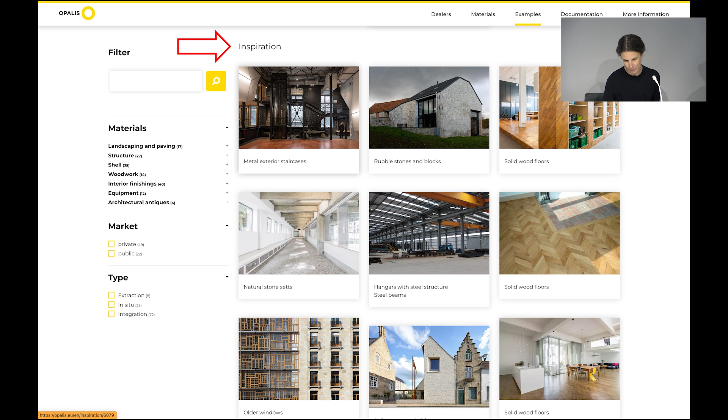It deploys detailed information on the project and the different phases that led to salvage. Then there's the inspiration part, which features more separate moments of design with components that are being reused, something more of an Instagram, Pinterest-friendly approach. It goes from very prosaic reuse of tile, for example, to salvaged contemporary windows or interventions that require a bit more design thinking.

This year, part of our focus is going to be gathering this type of project with a special focus on the UK. So this is a bit of an open call. If you know of any such projects, or would like to contribute further, please contact us at this address. There's also a form next to the door to add more details and contact information. You'll understand where this leads us.

All the projects featured today, we really hope to invest editorial work into including them on the Opalis page of exemplary projects, because they are pushing the limits of what reuse can do today. We're really happy to discuss them with you together. I want to say this effort is really just an initiative - it's only the beginning. The only resource we have is a lot of generosity and goodwill from you. We hope that in the future we can benefit from structural funding to support all the current stakeholders working on this type of project.

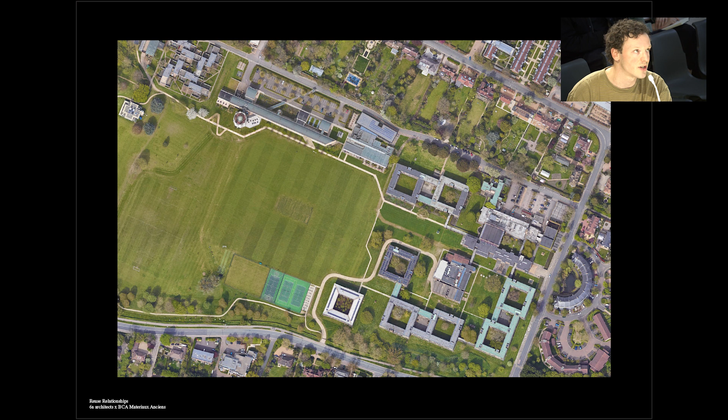So in a way, maybe counterintuitively, I've selected to talk about a new build project, partly because I understand everyone else is going to be talking about reuse projects, and partly because the relationship set up in this project is really key to our entry from heritage into working with reused

and reclaimed materials. So it's the project for Cowan Court, Churchill College in Cambridge, completed in 2016. The project uses different approaches to reclamation and applies the word reuse in a broader, architectural way, not only literally with the cladding.

So it's a 68 resident building, courtyard, which you can see there - this one next to the existing 1960s brutalist project on the right. 68 bedrooms, student residence, effectively.

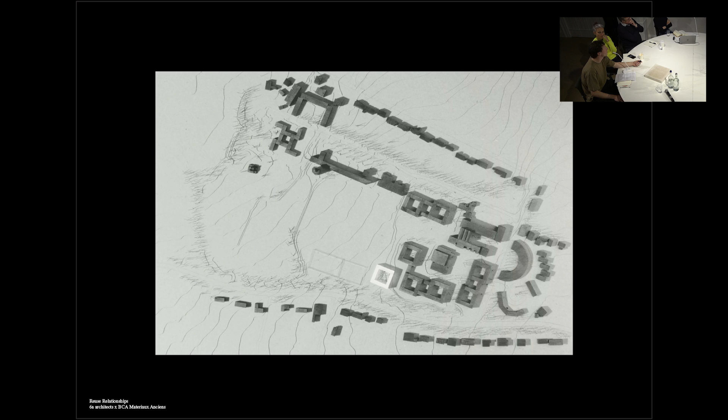Starting in 2008, when we won the project, it went on pause and then came back in 2012. Many of you might know the famous competition for this project, which garnered submissions from various different famous architects of the time. Sheppard Robson won the project, and the result is this series of interlocking courtyards.

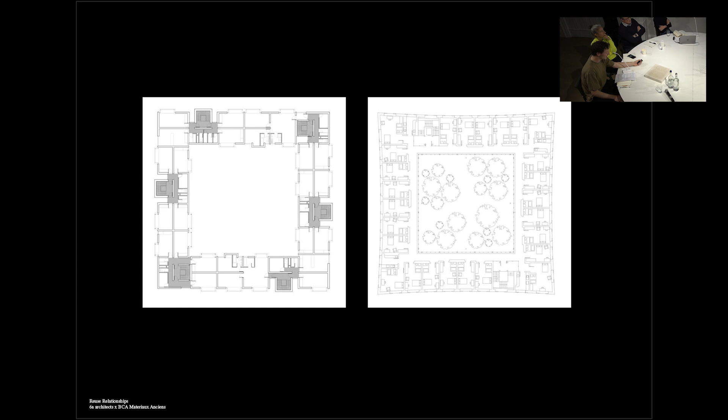It's famous for its English brutalism, exemplary of the time, and the innovation of this white heat of technology 1960s project is part of the reason the clients were so interested in a new layer of innovation with this project, where we introduced ours - you can see down on the white of the model.

Formally, Cowan Court reflects its typology, reflecting the same square court of the exact footprint of the existing buildings, but where the original staircases produce a kind of vertical accessibility, you can see on the new, right-hand side, an internal cloister facing in towards the courtyard with a densely planted garden, making all of the rooms fully accessible and facing out towards the great views beside.

The project combines glulam, CLT, softwood traditional framing, as well as reclaimed timber on the facade, playing into the reuse of the concrete tectonics found in the original Sheppard Robson building.

The facade itself echoes the existing buildings in three layers, with clear horizontal banding, where this classical column entasis curves at a different level at each floor, and the windows are spread around playfully on the facade. The reuse of timber - the original buildings appear to be largely of brick and concrete, but actually there's quite a lot of timber detailing in the hardwood doors and the fine rooms of the central college.

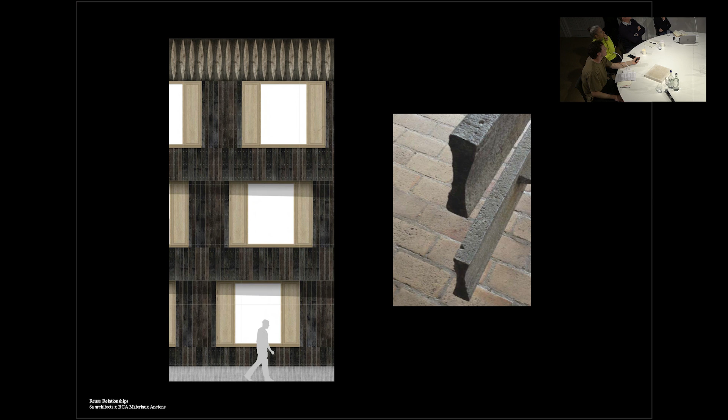So the reuse of timber and the total application of timber on this project really feels like a continuation of the materiality of the project, especially in the reflection of the cast texture you can see on the formwork. Then running into the details of the frieze up at the top, it again plays on a kind of mimicry—this is, for any of you who know the college, the entrance gate.

So all of these elements of reuse reflect, in a broader sense, a kind of working with the existing.

In terms of the procurement of the timber, we entered this through our kind of heritage experience. We had worked with both Declan Malloy in London, in Essex, for the reclaimed floors in Raven Row, and with Ashwells on the treehouse and the extension of a listed building.

But for the procurement of this project, we began by looking around the UK at various suppliers, where we quite quickly found that the timber available in the most reliable quantity and most reliable sizes was something called French wagon timber, effectively reclaimed from carriages that had driven around Europe for decades. Typically these are about 30 years old and a fairly consistent size.

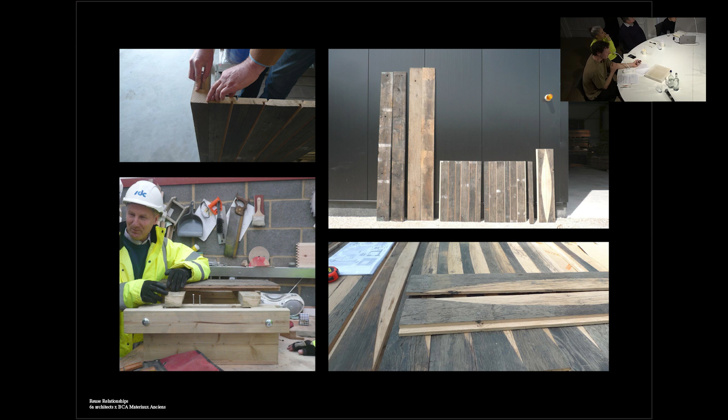In 2014, we got quotes where they were all roughly the same, around 150 per square meter. Now, the QS had costed for this at 210 per square meter, which in hindsight you kind of understand. Hopefully that was something we had discussed with the QS early on, to make sure we understood that reclaimed material does come with additional costs, so the eventual cost of this material would have been higher in terms of the activities that followed.

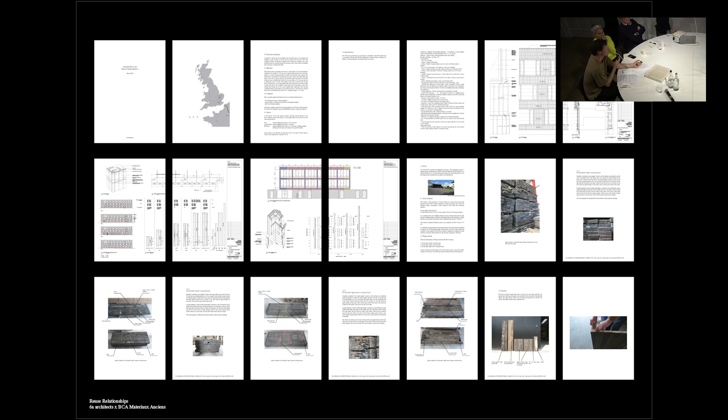Initially that seems like you've got loads, but in conversation with BCA we understood that the expected wastage was about 50%, so that was the perfect amount of material. In hindsight, maybe they inflated the numbers just so we'd buy all of it—no, I think it's a pretty typical thing for a timber joiner to say they need twice as much material to make whatever it is. So this was the oversupply of material we ended up getting.

They also produced various samples when we arrived. You can see on the corner we added a solid piece in order to not reveal the depth of the cladding, so it became much more about texture, surface, and colour.

You can also see the lapping of the joints—we elected for a lap joint, partly because when you cut the timber it's likely to cup and react once all the stresses are released. The lap joint is the most effective way to reduce that potential cupping, but the widened, large lap also gives a pinstripe effect as light brings out the dark, adding to the texture of the reclaimed material, and also serves as an aspect of tolerance.

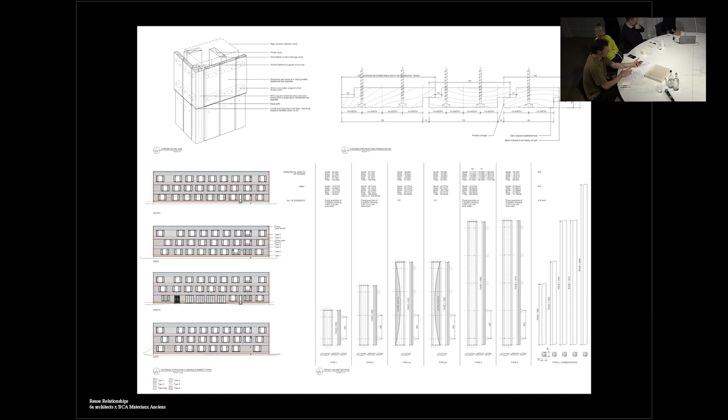But eventually it came down to a meeting with the Churchill College Committee, made up of almost entirely academics, maybe 40 odd people. In the meeting, Tom was asked: has this facade ever been done before? That's the kind of question you would typically answer with maybe five references, saying yes, it's been done before, don't worry.

But in this situation, because of the procurement style—this was design and build in the end—because of the scale of the project and because of the client, we just didn't have those references. So Tom said no, and luckily the response from this academic was, 'so you mean we were the first?' Whether that's due to Churchill College's ambition to be innovative with architecture, or simply an academic research interest in trying something new, that was a key success and a key win for the project.

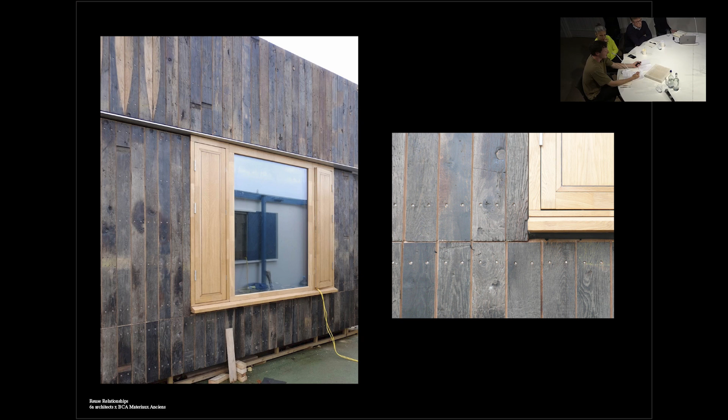This really speaks to circular procurement today—the fact that Churchill was able to buy the timber ahead of procurement was a real risk of theirs. Today we look for procurement facilities and marketplaces which can reconcile these differences in timescales between projects which are about to finish or about to reach a certain critical stage.

Another approval we needed was from TRADA on the cladding quality. We approached TRADA not only on the detailing and specification, but to try to get a certificate for this cladding. They tested it and produced a report, not a certificate, and where another client—a typical developer—might feel that was not enough, Cambridge, as a university college, never sells their buildings.

They have a 300-year lifespan and development plan, so they recognise they don't necessarily need a warranty to say, okay, if we sell this we need a certificate for it. That was another way we were able to pass a hurdle you'd typically get in a reuse project.

TRADA produced a specification which was quite long, but I'll read one example: face finished dimension varies from 150 overall—this is meant to minimize wastage, but a max of 150 is to avoid pulling fixings during shrinkage and expansion. So the way you deal with a reused or reclaimed material has to flow through all of the production an architect is involved in, down to the specification.

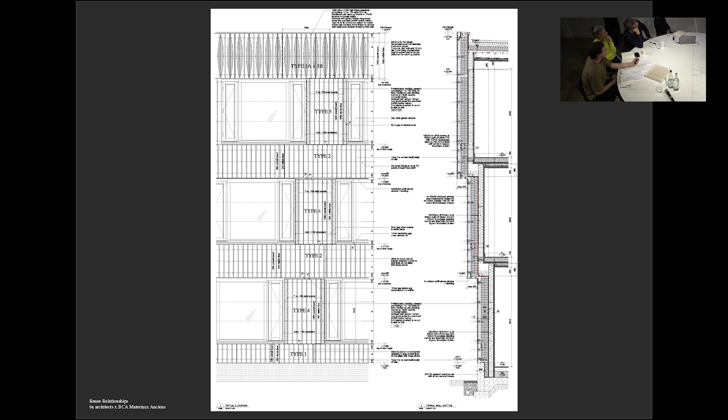Another bit of detailing developed alongside the contractor was to avoid these dark patches beside the windows. The contractor said it's much easier for them to prefabricate these timber boards in panels and fix them on. So what we ended up doing was leaving off one board on the side, so that on site the exact board width could be laid in.

So yeah, I think you can even see it, maybe not at this scale. You can't really see it from this scale.

The contractor also produced a rig on site that helped them take these prefabricated panels and lift them directly on. I think another key element in working on reuse projects is engaging with the contractor in the same way you would on a film set, building jigs—like in a workshop you'd build a jig to make something bespoke for that exact purpose, but you're going to use many times to deal with something quite specific. The jig they produced to lift these onto the facade was a key suggestion by the contractor that was really helpful for us.

A DEFRA report recently released indicates that between 1998 and 2011, the reuse of reclaimed timber fell by 90 to 98%. When you compare that to total consumption, which has increased, that's an equivalent reduction in reuse—9% of timber in 1998, so 1 in 10 pieces of timber was reused, has now dropped to 0.43% in 2011. So the reuse of timber has dropped hugely dramatically, and that's consistent across the majority of materials. We have to drastically increase the reuse of timber.

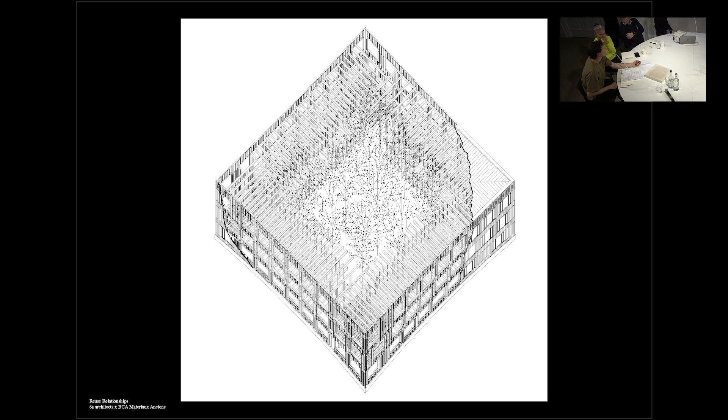Looking at the project again, you saw the photos of the structure exposed. A lot of it was new timber, and I think potentially we would look at opportunities to swap out the timber doors or any of the softwood framing with other reclaimed products.

This project came, I think, before circularity became a big topic, and so it progressed in a pretty improvisational manner, one that came from our understanding of the nuances of working with heritage and having to engage with quite particular circular collaborations with different people. Obviously BCA participated and contributed a huge amount, but another key relationship that was necessary there was Trada, acting almost as a kind of material authenticator, taking a material and allowing it to be used in a UK context. So that was another key relationship for us.

I think that's it. Sorry if I went over.

Oh sure, God, you've put me on the spot there. Do I know exactly what Trada is? The Timber Research and Development Association—there you go. Thank you, Robert. They are the association that has the kind of timber expertise across the UK, and they produce a number of reports and guidance.

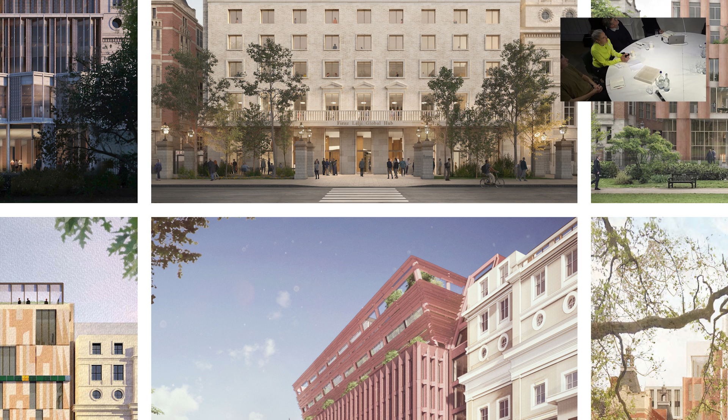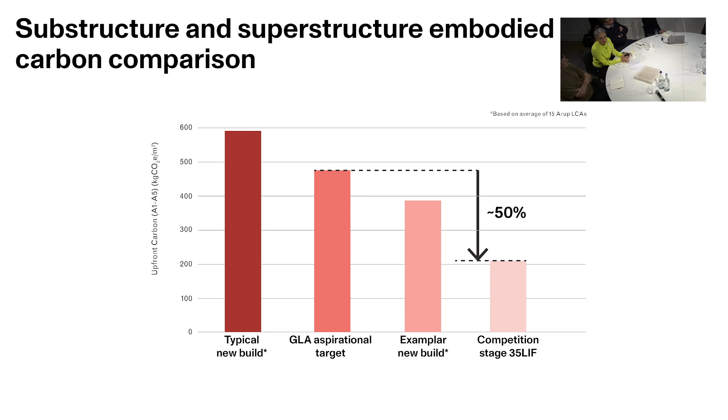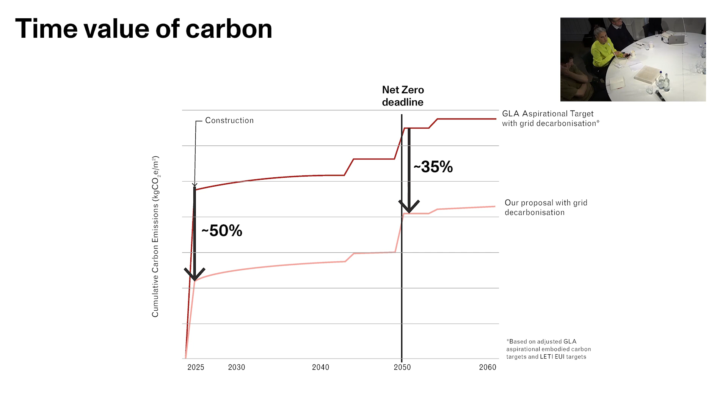The competition was solely, I would say, about telling the story of the value of the material of this building—not the value of the building itself, because it's not a listed building. As you saw, many of the other competitors decided to disregard the facade completely, but our key slide was how we were able to lower the impact of our proposal by 50% compared to all the others. We really wanted to demonstrate how important it is to save carbon not so much in the future, because hopefully the whole grid will be decarbonized, but how massive a change it would be to actually retain the building and reuse the material now. It was a big shift to not just saving carbon, but saving it now and not in 50 or 60 years' time.

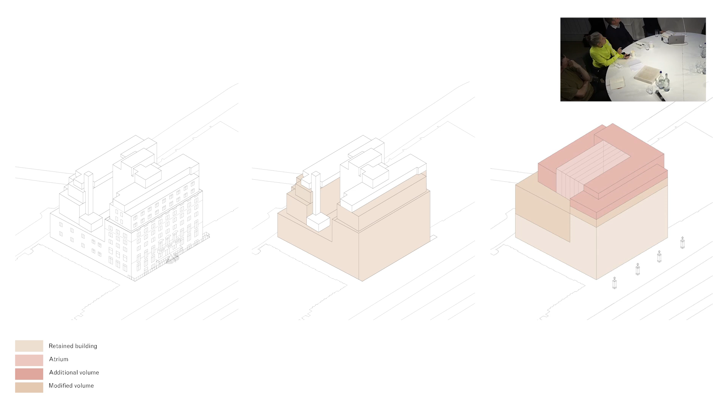So this is, in a nutshell, what the building is. You see the existing building there—we retain the majority of it and extend at the top. That's the condition of the building we found: actually a collection of buildings built in different phases. You can see the floor-to-ceiling heights are very different north to south, and it's very difficult to move inside the building. There are floors that don't communicate with one another—you actually need to go down to the ground floor to reach the same level from the south entrance, for example. Here you can see how we worked with the existing building, opening up the center and connecting the ground floor to street level.

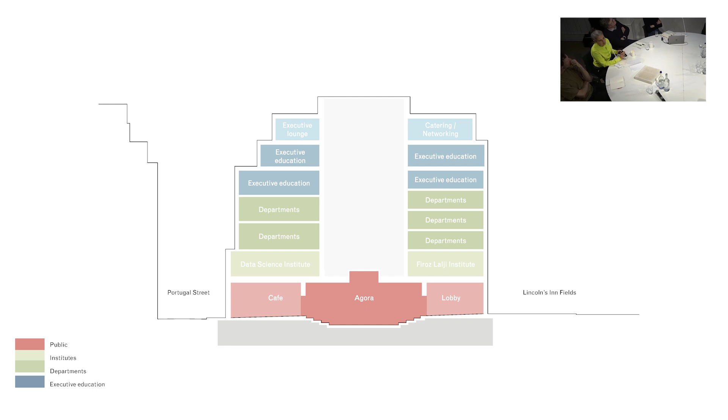Really diverse program inside that we were able to fit within the existing building, kind of public ground floor and first floor departmental areas. At the very top is an education facility with classrooms and services for the executive education.

I'm glad that you presented an educational building. So somehow we see the university pushing this agenda very much at the forefront.

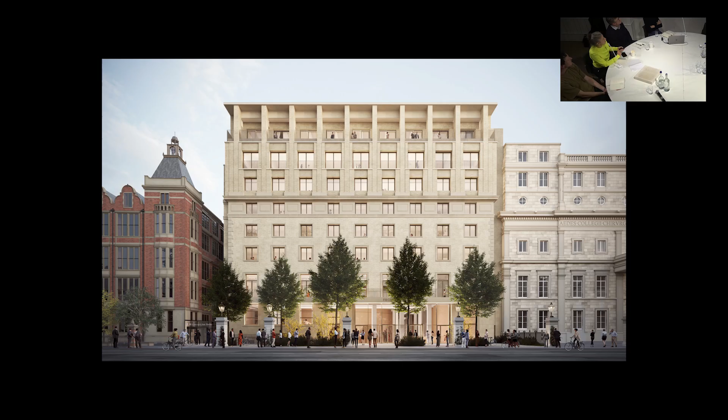So that existing building, this is the project. And just an image on the outside - you can see how the existing facade is growing into the new building, and the entire facade becomes a contemporary design. So the project represents a new approach to reuse that moves beyond pure heritage and conservation concern, and recognizes the building should be protected for its material quality and physical capital.

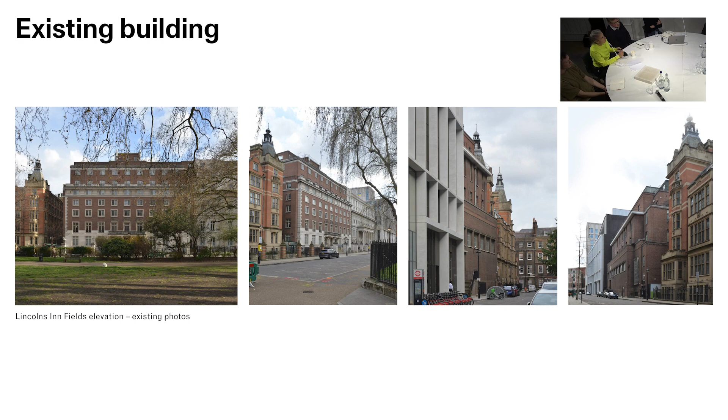As an important part of the fight against climate change. So what does it mean? It's really looking at your building as your material quarry. You take the building you're working on in its entirety, you don't waste what you already have, but you're able to work with it, and the new architecture always grows from what you can find there.

So as I was saying, big study on the existing building, actually also with the students of the Department last year. There was great collaboration. It was really nice to share the knowledge of the building and think about how to incorporate circular economy in every aspect of the design, even starting from a very research approach, like as you're doing.

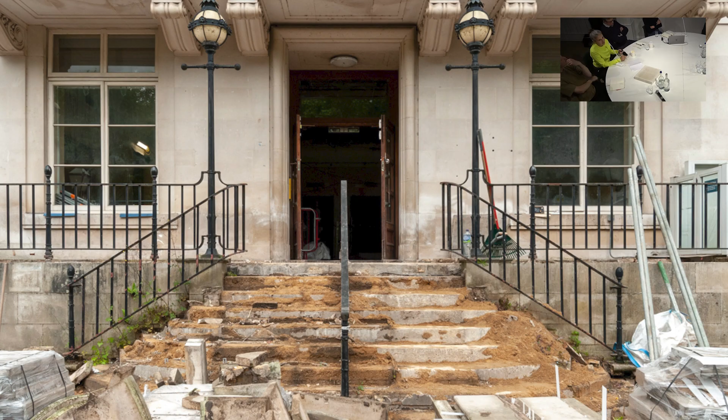So how can we use sustainability targets to drive new design ideas? We wanted to shift the thinking a bit from a box ticking exercise - yes, we do this - but how actually the sustainability targets are driving the way that we design, and how we use them to actually inspire new design ideas.

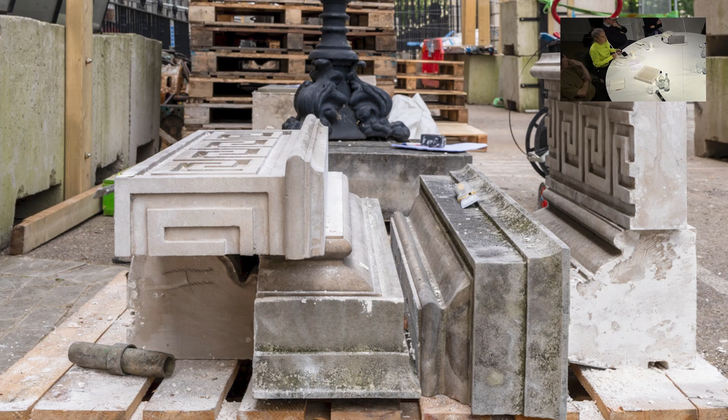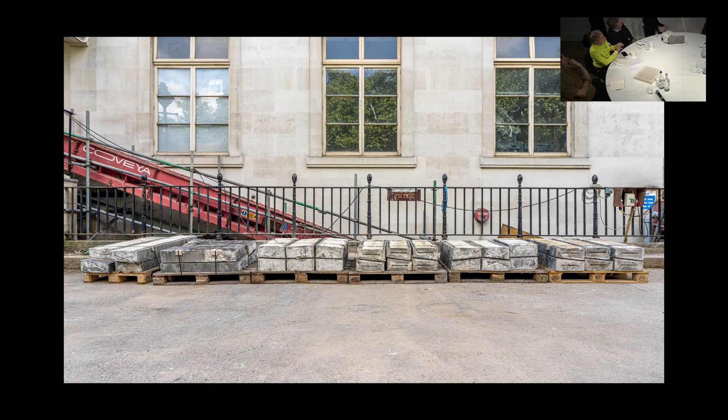And that's the building as it is now. We start working at the very top, and inside there is no hoarding on the facade because we are keeping it at the moment. We are just deconstructing, so the pure construction didn't start yet.

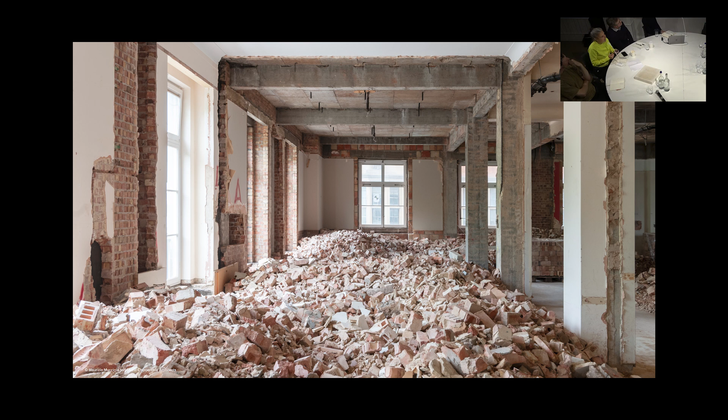As Robert will tell you in a second, we started saving stone by stone. We took all the opportunities to actually save as much material as possible. Procurement is definitely a key part of the process, especially in our case where we had two contractors - one is the enabling work contractor deconstructing the building, and the main work contractor is not appointed yet, but we know we are working with them already to make sure that the materials we are saving will find a proper place within the new building.

So, for example, PAYE is a really key link in between the two. We need to learn how to work beyond just the relationship between the architect and the main contractor - you really need to know the whole team and work closely with everyone. This is exactly the work that PAYE is doing, collecting the stones. We went on site several times, did a survey, and learned about the existing building and the opportunities that we had there.

And finally, those are the coping elements that were at the very top of the building - the stones that were at the edges of all the steps of the existing building, which were collected and stored at PAYE.

We are doing a very similar approach also to the inside. This is just a peek of what is going on inside the building. We are taking the opportunities to save as much as possible of the bricks that were part of the build-up of the internal walls. So we are cleaning them, palletizing them, and they are now ready and waiting for the next contractor to come on board and reuse them in the project.

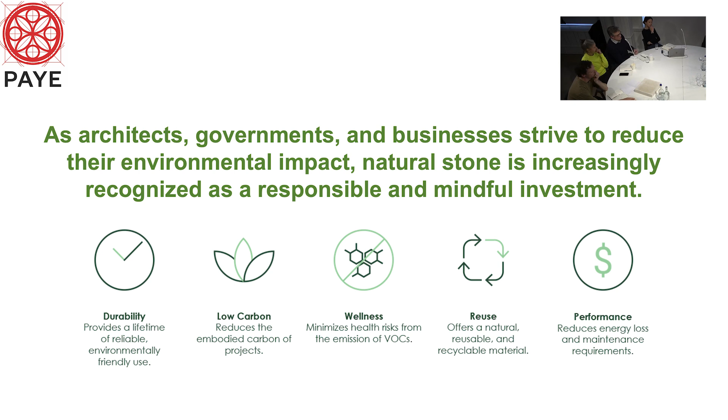We're stonemasons, and stone is such a fantastic material, and it's really suited to the ability to be dismantled and repurposed and reused. There are so many good benefits to its use.

I think part of that is down to the London planning policies. We see the difference between London and the South East, predominantly London really, and the rest of the UK. There's a real focus on material circularity and repurposing in London, and I'd say the rest of the country is about 5 or 10 years behind in that development of ideas.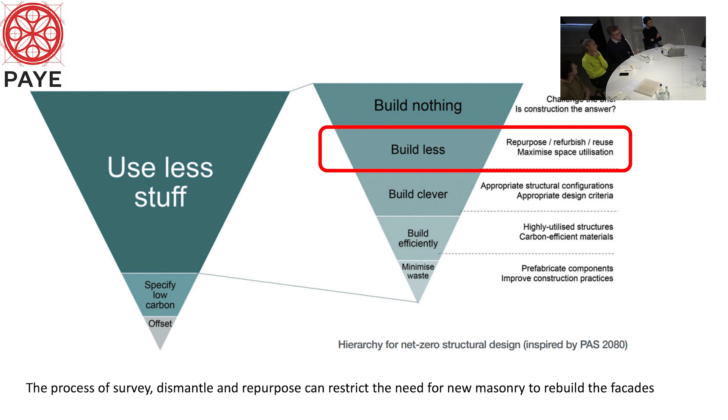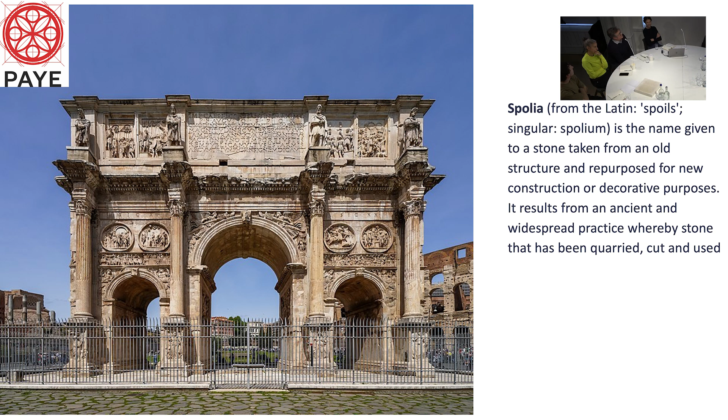There's some great work that's been done by the likes of the Institution of Structural Engineers that really does look at the idea of how you repurpose and reuse materials, with the main premise being trying to use less stuff. It's not always possible to do nothing, and we sit in the second box down, which is build less. So we try and take the materials, store them, and then reuse them in the most beneficial form.

It's not a new thing. There's a great word called spolia, the Roman or Latin word for the dismantling, repurposing and reuse of stone on the next project. And they were very good at it.

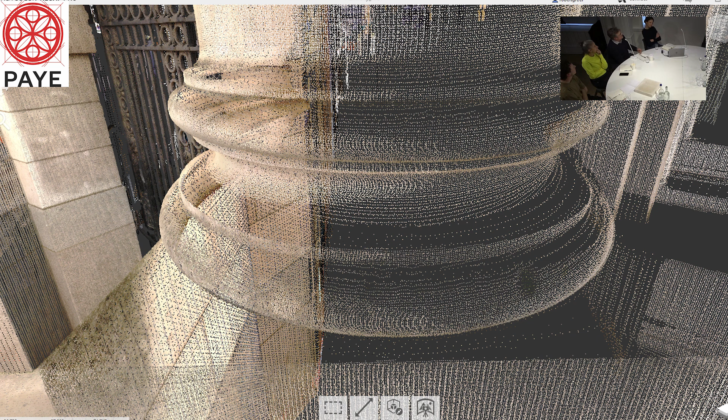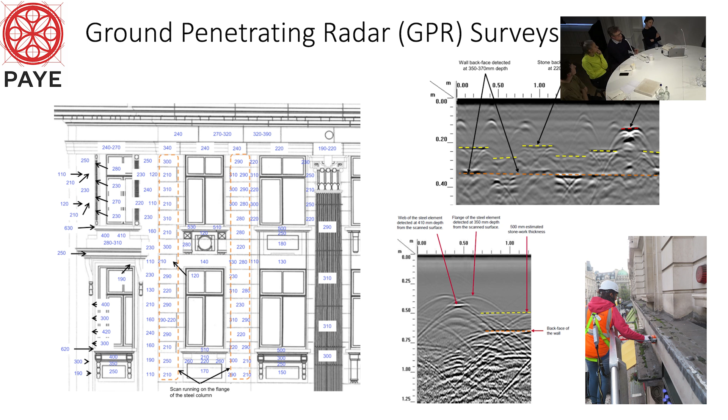We can then do GPR surveys, which allow us to understand what the depth of each stone is. And from there, we can create a 3D model.

So this 2,500 tons of stone that we've dismantled, we're going to put back about maybe 1,500 to 1,800 tons. So we're going to have 700 tons of spare stone that we're then going to start to repurpose and reuse. It's classed as carbon free because it's second hand, it's come off a building already.

So we look at the circularity of stone, and it's very high value. When we dismantle a building, we normally achieve about a 90 to 93% material recovery rate. We may sacrifice some stones, or some may be fractured and damaged that we can't reuse, but typically we're getting a high number. And when you start to look at its repurposing and reuse, looking at the LCA assessment of materials, it's a very high circularity percentage.

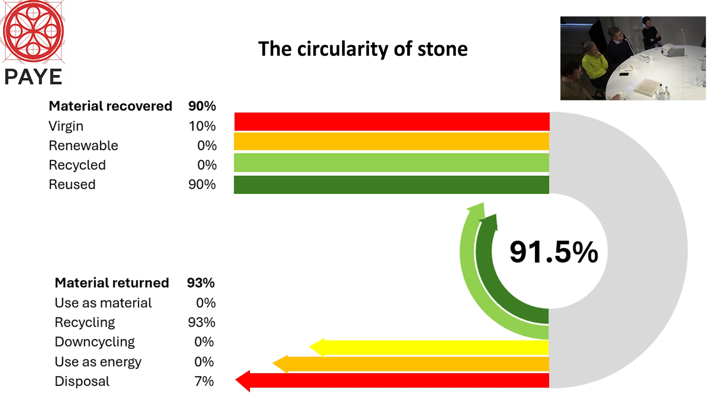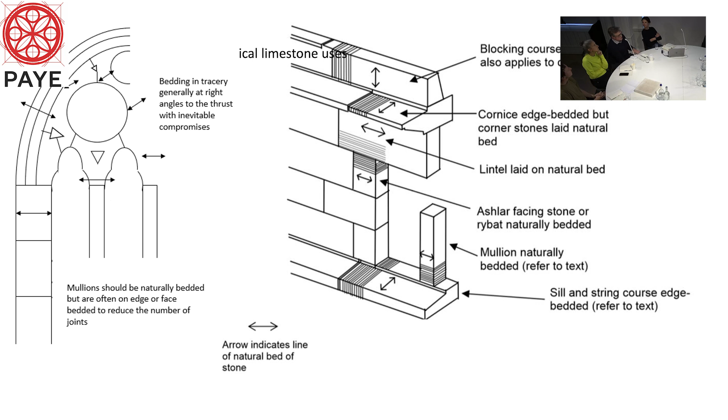Like all butchers, we try and use as much of the original stone as possible. But it's something we've got to be mindful of with stones, particularly limestones and sandstones. They are sedimentary, so we have to be respectful of the bed of the stone. So ashlars, vertical face stones, the sedimentary beds are horizontal. Copings work in a slightly different way. So we have to be very, very careful in how we cut and repurpose stone to get its best use.

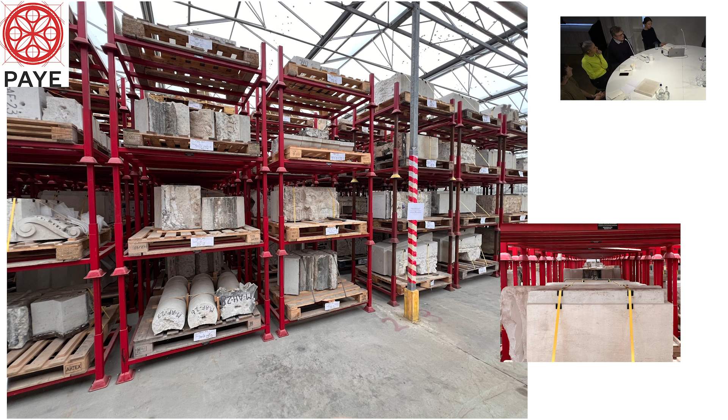The way we dismantle the stone is we use traditional quarrying techniques, and here we have plug and feathers, which is what we use for splitting the stones to break the bond between them. We then use a lovely thing called a Lewis pin, which is what we use to extract blocks from the quarry, and that allows us to lift stones up to about 2 ton. Once we've lifted it up enough, we then strap it and move it on block and tackles.

We then catalogue all the material, like we saw at the LSE, so we know what we have as an inventory of materials for repurposing. Then it goes into one of our warehouses. At the moment we've got 8 buildings in our warehouse, about 5,000 ton of stone in total, all at different points in their journey of repurposing and reuse.

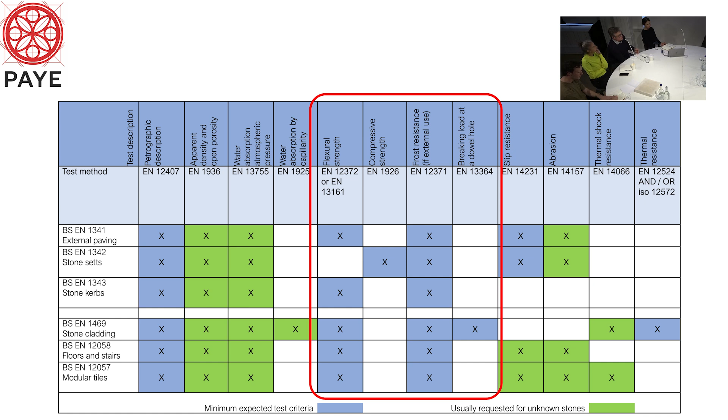Stone is quite an interesting material. We have a lot of provenance on most stones that we use. There is an expected set of testing that we have to comply with, but there are certain things that if we check quickly, we'll know that we're getting the kind of stone that we have historic data on, then we can gain some confidence in its reuse.

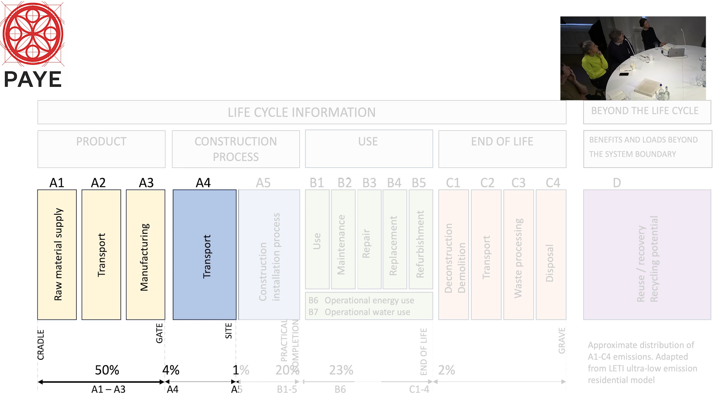When we look at its carbon value, the numbers we're really focusing on are the A1 to A4 values, and they're the ones that really affect the comparison of new stone versus repurposed stone. If you look at new stone, it's typically for 75 thick stone, we're looking at about 23 kilograms of CO2e per meter squared. For repurposed stone, because we don't have to consider the value of the stone extraction, we only have to look at its cutting and then its transportation to and from the site. It's about a third of the value, so carbon cost is a significant benefit in reusing repurposed stone.

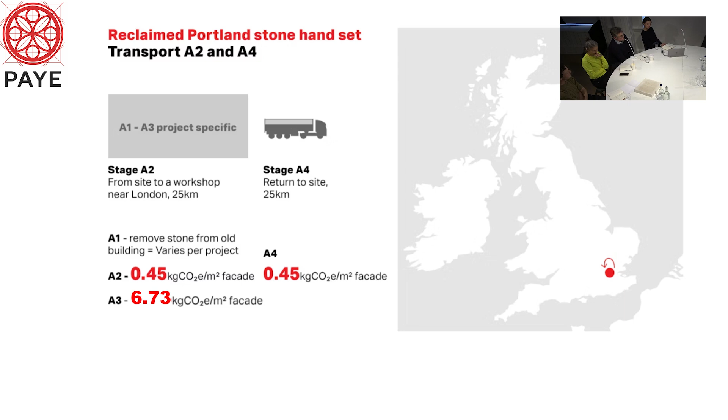Sorry, I'll go back on.

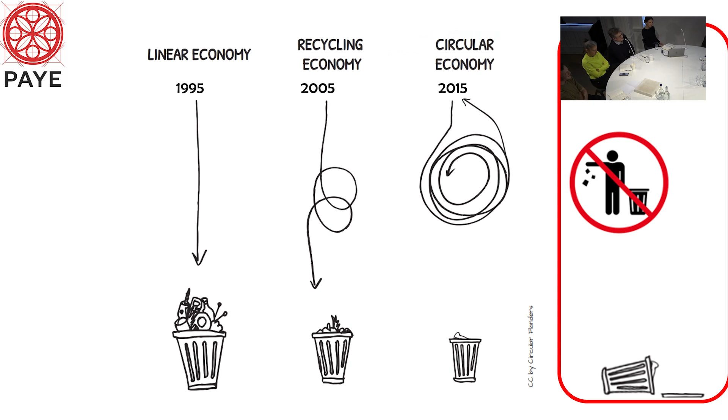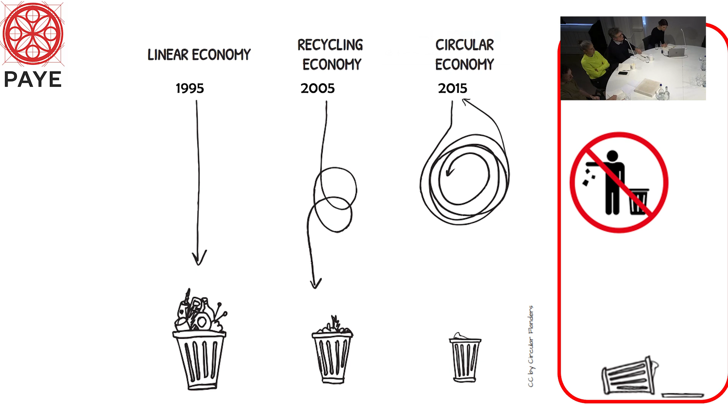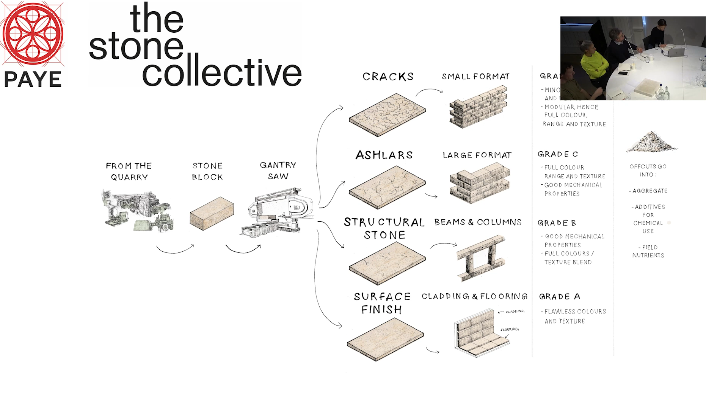The first thing we're saying is you can't have best grade, middle grade, and poor grade. Everything has to be used. We have to try and use as much of the stone as possible. So if there's a little shell or blemish, that shouldn't stop you from using that material.

The other thing we're looking at is post-tension stone. So all of that stone that we saw in our warehouse, we're looking to cut those into blocks to put a post-tension wire down the middle of it. Therefore, we don't need concrete. We can create post-tension stone columns, post-tension stone beams, which then removes the quantum of concrete that we need for the construction of a building.

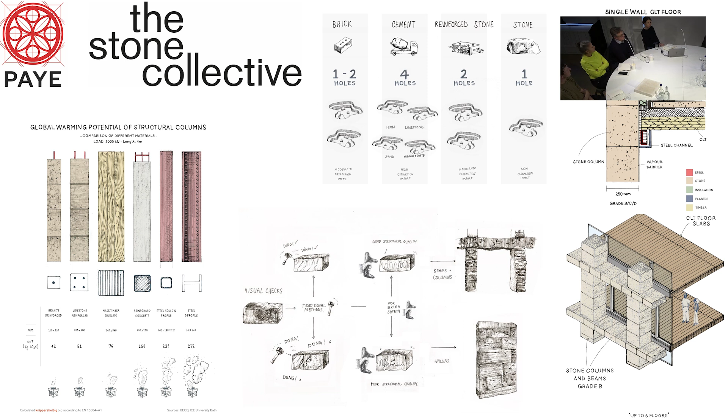If you look at the Stone Collective, it'll provide you with some knowledge and the research we're doing this year on post-tensioning and fire damage, and how we can move it forward as an alternative to potentially timber, but definitely instead of concrete. Thank you.

So I'm Claire, I'm from Stanton Williams. While you just see me here today, there's a huge collective that makes up the team working on the London Museum, including PAYE Stonework, who's been working with us for years, and many other collaborators along the way.

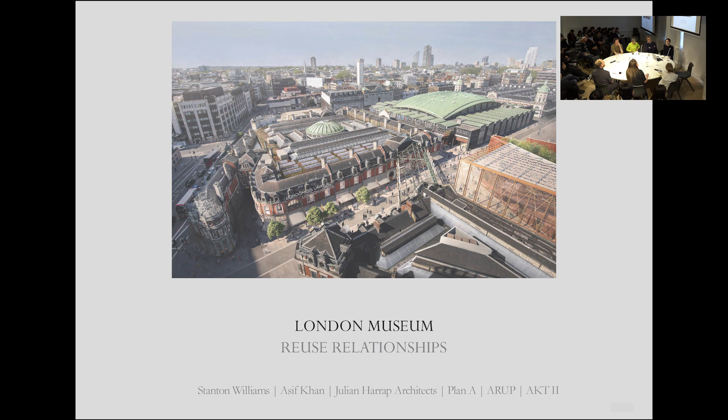The Museum of London is currently located in the Barbican site, for those who know it, but perhaps you don't, it's quite hidden away. The existing buildings really don't work particularly well for the museum, and they're only able to show a very tiny percentage of their collection. So they were on a hunt for a new site. The Smithfield site was offered to them after a huge amount of failed opportunities, or other options for the site, and it really kind of felt like it was a match made in heaven, really.

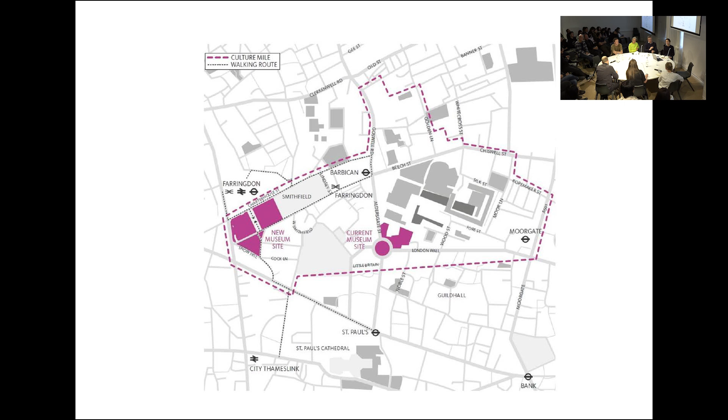Before we started the project, it was quite important for us to understand where the buildings had come from and what they meant to London and how we might be able to reuse them.

The site had been used as a livestock market for about the last 800 years. There'd always been some kind of trading on the site, including St Bartholomew's Fair, a huge 3-day festival in London with loads of merriment going on. So it was a really culturally important point within London.

That site completely transformed when the railway came in during the 19th century, meaning goods could suddenly start coming from much further afield. Around the same time, Parliament passed an act that no longer would you have live livestock on site, you would have dead livestock trading instead, which saw the development of this trading quarter.

So you've got the two traditional metropolitan meat markets at one end, which are not part of the Museum of London, and then the general market, fish market and poultry market, which was the site we were redeveloping. They were built by Sir Horace Jones, a great Victorian architect of the day.

The general market, while intended as a fruit and vegetable market, actually, due to the popularity of meat, by the time it had been built, started trading meat instead. It underwent a huge amount of change in the 50s when the last V-2 rockets in the war demolished part of the site, and that was rebuilt in the 50s.

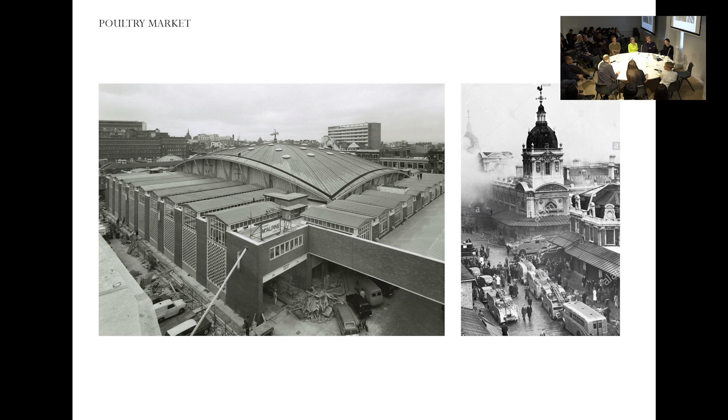So we had this beautiful contradiction of two very different buildings to start with.

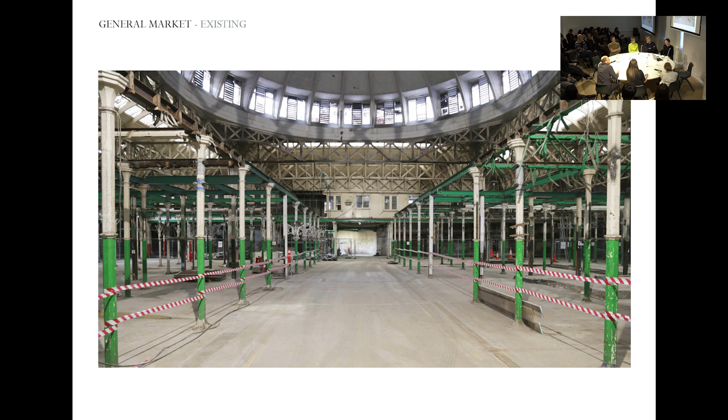The General Market building itself had been left abandoned for about 30 years or so by the time an emergency set of works started on site, basically to try and stop the buildings from completely crumbling around us. So while their bones were beautiful, wonderful spaces, there was a huge amount of disrepair and damage that had been done through that abandonment.

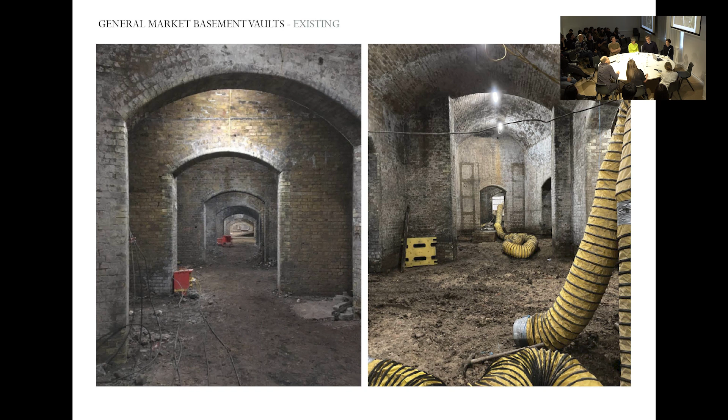The basement was being used as a car park and storage. Crossrail moved in there for a little while. And then parts of the basement had actually been blocked up. We unblocked them and found some wonderful spaces hidden in catacombs as well.

And the poultry market had a handful of traders in up until quite recently. So it was quite a different set of conditions.

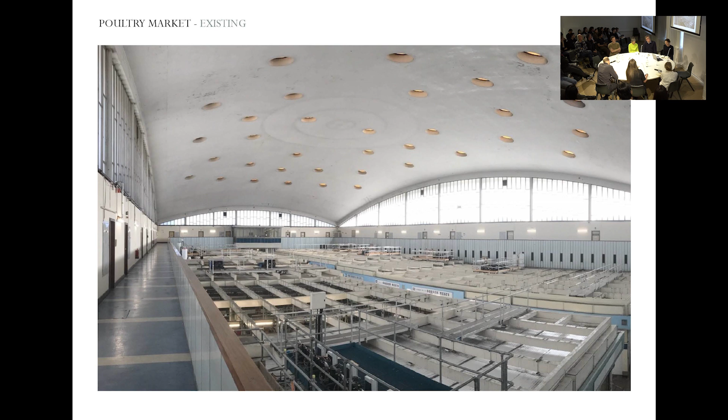So those bones were the basis really of starting to look at how the museum might inhabit those spaces. And really the aspiration from the outset was very much to try and reuse and utilize the buildings as best as possible. We're talking about circular economy, that's reuse of the material, but keeping as much of the buildings as we can was the benefit.

We worked really hard with the museum to look at how we could organize those spaces in quite a passive way, essentially. So, for example, some of the permanent galleries, which have some of the most demanding objects within, were placed in some of the cooler locations.

Some of the museum's briefs had to adapt and change to the spaces we had available. So that dialogue with the museum was really critical to understanding how we could organise and utilise those buildings.

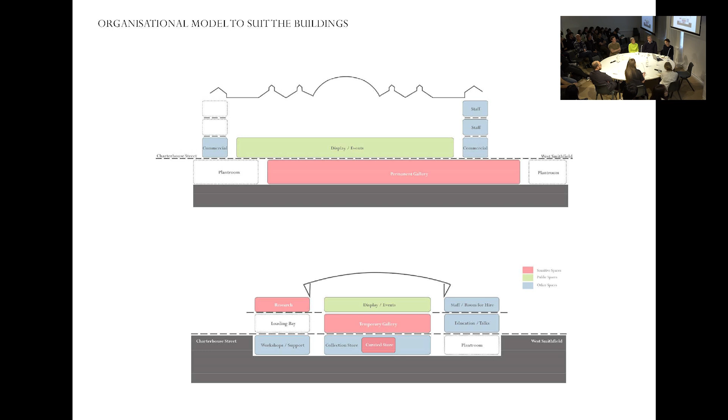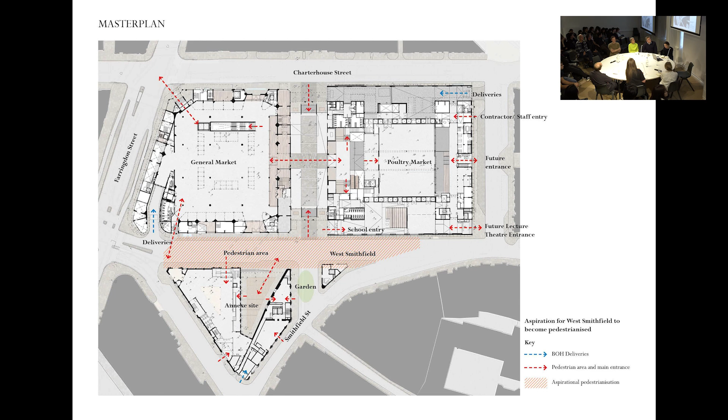So it ended up in this arrangement where we created a new kind of temporary gallery within the poultry market because there was an opportunity there to be able to put that insertion in. But the general market trying to use essentially the bones of what was there already, and very minimal insertions went in there onto the material reuse itself.

So while this is quite a simplistic diagram, we tried to look at all the material within the two sets of buildings. They've undergone a huge amount of adaptation and change over the years. Some of them providing very obvious conservation reuse, others providing less obvious conservation and heritage material.

First and foremost, we're in a very lucky position in many ways that we've got a client who's incredibly interested in trying to reuse as much as we possibly can. Some of the material is either used within the project or sometimes even going into the museum's collection, for example. So we've got that lucky kind of option within that.

Otherwise, if we're not able to use it within the project, we're looking to work with the salvage market as much as possible. If that's not possible, then diverting to recycling either the material itself, but sometimes recycling back into the project as a new material. And then the very last options, which we really don't want to go to, but are the reality possibly of construction projects, is tracked waste disposal, and even 1% going to landfill, which nobody wants to be doing, but it is, again, part of the reality potentially.

So some of the more easier kind of heritage material reuse for the project. As I say, the site has undergone these many layers of different history throughout its many lives, and we didn't want to necessarily erase all of those lives.

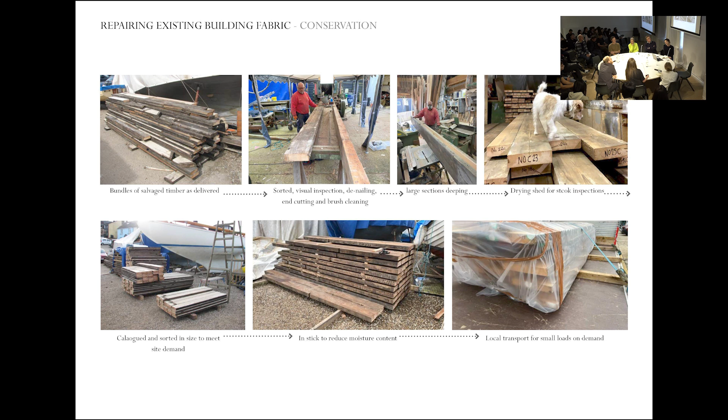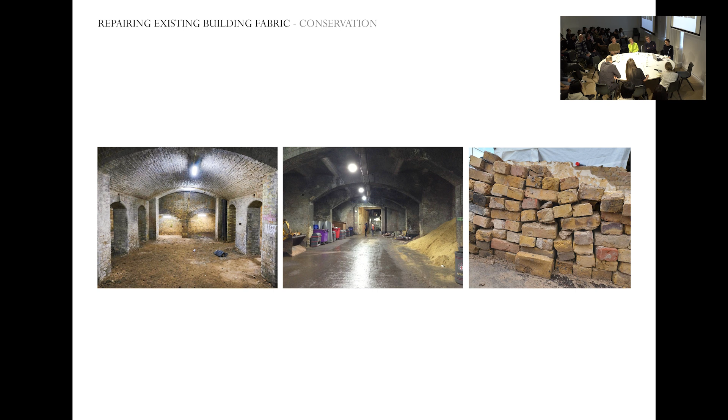Some of the other kind of easier wins as well. So wherever there were new insertions, we reclaimed the bricks in a similar way, sorted, cleaned, reused wherever possible. If it wasn't possible, we've run out of bricks, we've utilised reclaimed bricks from the market.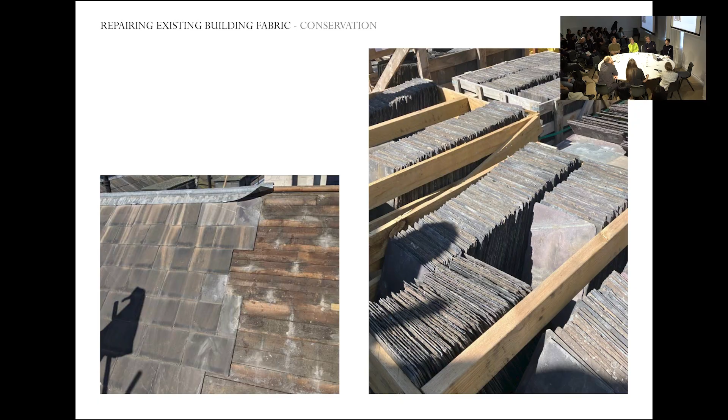Slates, similar type story. Some of the existing roofs were in such poor condition that it was not really feasible to keep them as such, but we kept all of the slates from site and reused those throughout the existing roofs. We had some wonderful original shop fronts from the original construction, which again, sometimes will need repair, but the bones of what we've got there are so wonderful that we're able to conserve them.

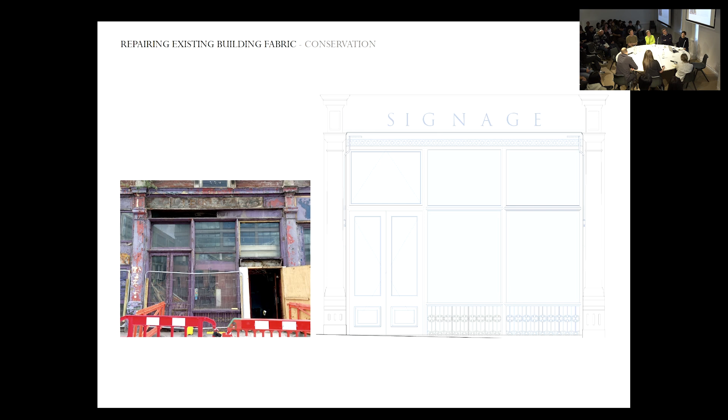And other little items come from the building inventory that we did from the outset. So lights, fireplaces, signage, spiral stairs, all going back into the proposed scheme. Some things like, for example, the existing spiral stairs are a bit of a challenge from a regulation point of view. We've had to adapt them perhaps a little bit more than we would have liked to for building control, but we've kind of got there just about.

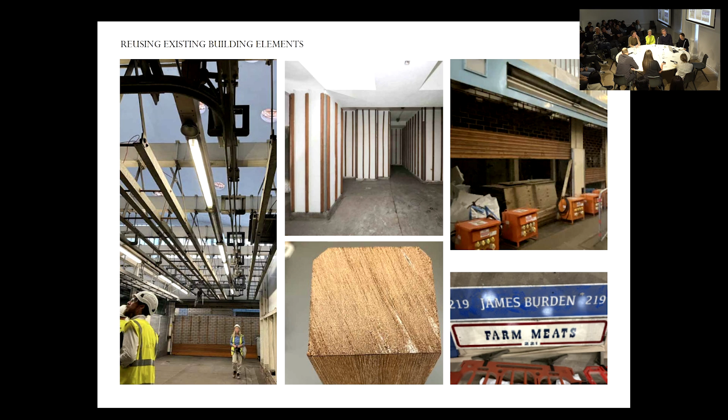Moving into the poultry market, quite a different ilk, had these really amazing high quality hardwood timber battens, which we're utilising in things like furniture and timber cladding within some of the spaces. The meat racks we're using as lighting rigs, trying to hold a lot of the MEP on.

Some of the roller shutters we're getting refurbished, reused, signage as well. This kind of summarises the process quite well, that dismantling of the building, trying to understand what we can reutilise as much as possible within the scheme, from door handles - but even door handles we've had to go through building control to make sure they're happy with the slight discrepancies.

It's interesting. And then we've managed to work with several partners for some of the material we weren't able to use on site.

Yes Make utilised some of the existing carpet tiles. They recycled them and used them for waterproof cladding. Some of the door frames got refurbished and then went into a community centre via the timber company that we were working with at the boatyard.

Global Generation took a load of the temporary site set up we had just to get safe access into certain areas - that timber got reused with Global Generation. Even things like whiteboards from the existing buildings went into some of those as well. Material Index helped make a lot of those connections with various companies.

We even had a small local pub take some of the ceiling fans and industrial sinks. LASSCo took the secondary columns.

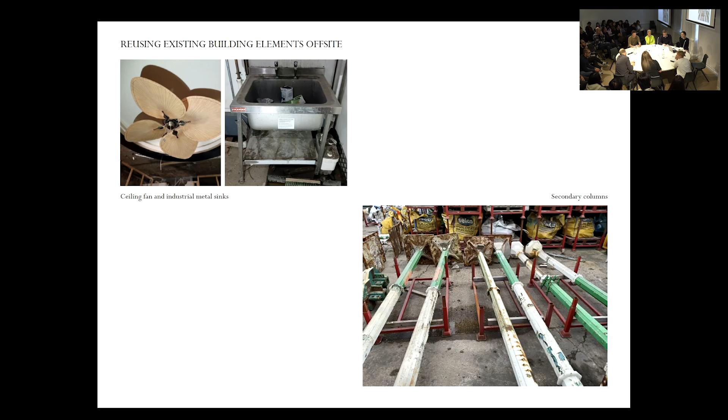Some really boring bits, apologies. So some of the bits that made it possible to reutilise the material - we did a material inventory from the very outset, looking at what we thought we could reuse. That had to go into the specification so we could make sure it was captured and controlled in that way. And then everything gets tracked all the way through.

From condition to quantity, where it's going, maybe that person's accepted it or not accepted it. And the next one shows again kind of units - so we need to know how much material we're dealing with, where it's stored, and so forth.

Some of the challenges I've just talked about a little bit, but we've had a lot of missed opportunities with, for example, storage and timing. So for example, the poultry market basement was clad in cork as insulation in essence. We had an interested party in recycling all of that, but the logistics of getting their trucks to site in time to take the huge quantity we had in the building wasn't possible to marry up. Some of those simple aspects make it incredibly disappointing and disheartening.

Risk and liability - we try and give away far more material than we can. Either companies don't want it because it's not certified, it's not tested, or it's a risk for the client because it's still the client's material that they are giving to somebody. Undoubtedly, there's been additional cost involved in this as a process - time, effort, and investment from the client, trying to make sure that we can achieve the end result.

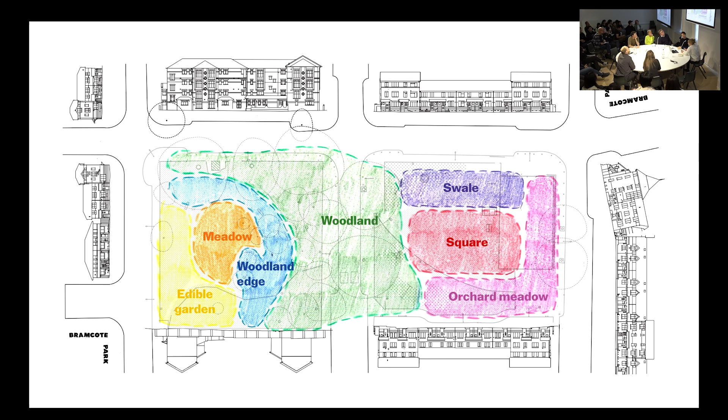The overall narrative - I won't talk about it too much because I'm just going to talk about the reuse bit - is to make this park the new front garden to the houses that it's surrounded by, and to reuse as much as possible in the process of doing this, and have a more active square in the north and a wilder woodland in the south. Reuse is kind of at the heart of all of the processes, from the soft works to the hard landscaping to the park infrastructure.

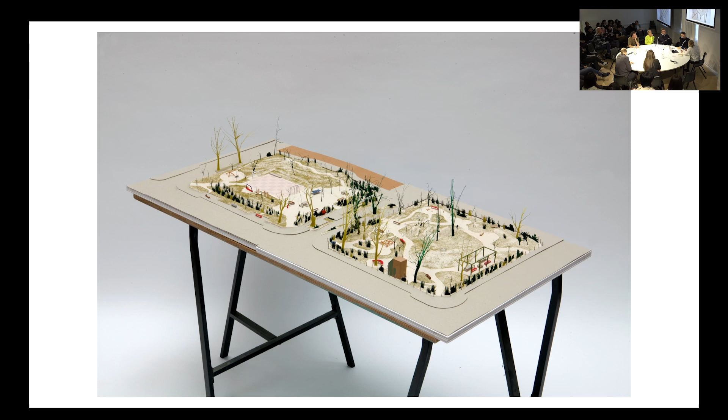So led by Local Works, much like some of the other projects, we did this material audit to squeeze out of the site as much potential as we could. We really categorized things by size, material, condition, their storage requirements - all of these are really important to consider whether we can then reuse them.

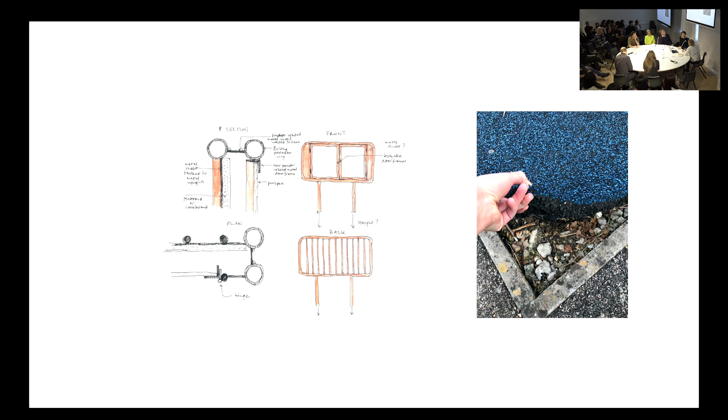So we're really right at the start of the project. We did a test piece, partly to engage the people living there, but also to make ourselves start thinking about what we really wanted to do. So here are the existing swing barriers with no swings. The idea was to make a notice board to tell residents what was going to happen - make the notice board from the swing barrier, use the rubber from the ground for the pin board.

This is quite a nice picture of the transformation of the swing barrier. But we didn't really have enough budget to do it properly, so actually we had to chop its legs off at the ground and not lift it out with its existing footings. So even though it's a fun indicator of what's to come and plays into the reuse narrative, it was really expensive to do, and we're going to have to pour new concrete to put it in the ground in the new park at the end. So ultimately, maybe it's not a good example of reusing well, but we learn from our mistakes.

So this is the existing goal, which is part of this multi-use games area, which is going to be transformed into a much more open square, but we're going to keep the goal. The idea is to keep as much of the infrastructure that we're going to keep in the park on site. So we're going to lift out the goal with its footings and then replace it in its new position with timber additions and new colourful netting and chestnut posts that are attached to it, screwed into the original goalposts. So the park becomes more open as a result, but we get to reuse this infrastructure.

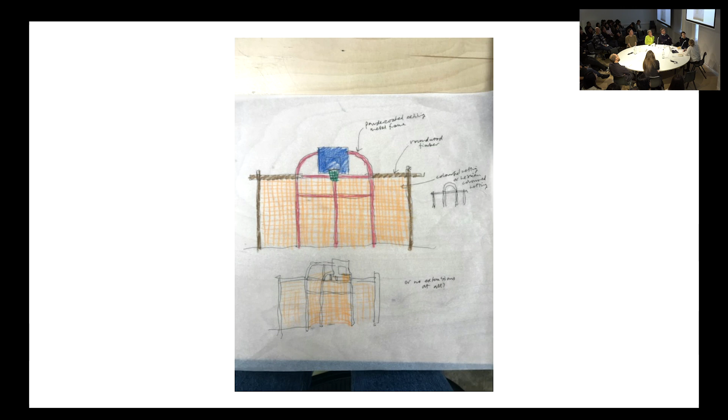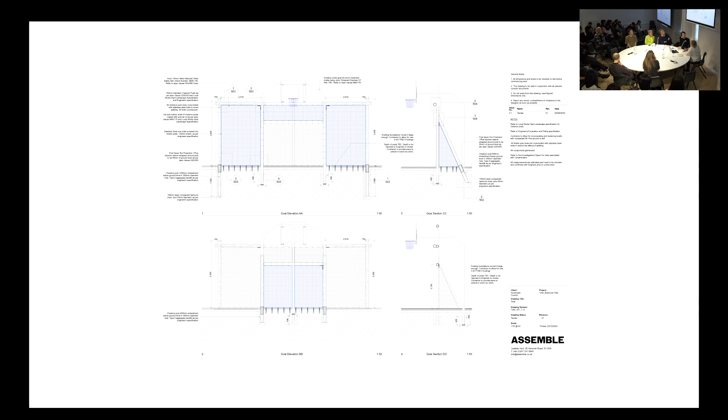And it seemed like a small thing to do, but it obviously required drawing up in a lot of detail, and also making sure that our chestnut posts were actually driven into the ground, not using any concrete foundations - using these fence post principles so that they sit quite deep in the ground, surrounded by gravel, so any moisture drains away and doesn't get stuck in concrete fittings.

Working out the connections from the new timber additions to the old goal posts then provides all sorts of worry for Southwark Council, who are the client, in terms of warranty for the project and how long it's going to last, and getting the fabricators on side to do this. These have all been challenges, mainly because of warranty - it used to be an off-the-shelf product and now it's a bespoke product, which has warranties for different bits of it, but not for the whole thing. So it's a really ongoing conversation with Southwark to get them on board that it's going to be okay, and it's going to last, and it's going to look good.

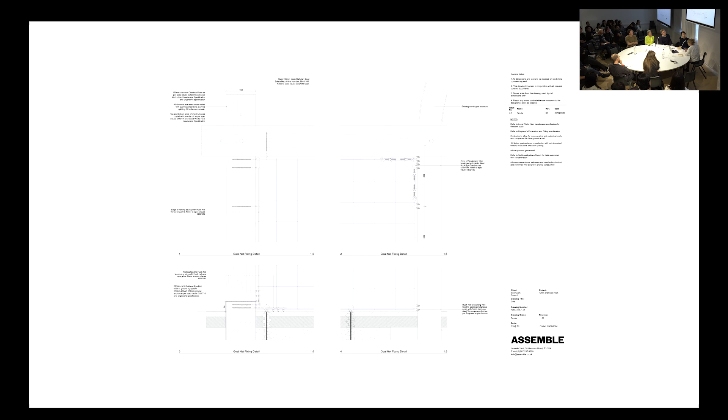One of our quite big wins is the trees for the park. This was actually a temporary installation called Fleeting Forest, installed last Christmas in Granary Square. This was a brief for a project commissioned by Argent, the developer - a very different client to Southwark Council with very different amounts of money. This was to design a Christmas tree, and we used this project as a provocation: can we use the temporary installation positively to impact communities and environments in the long term?

So if we were going to do this, we needed to sensitively gather and disperse materials, tweak the brief, and make this pot of money work harder. We proposed to Argent that we just buy lots of existing trees, store them in King's Cross, and then once the Christmas period comes to an end, we move them, and eventually plant them in Bramcote Park in Southwark. So our small council-led project can then benefit from a slightly performative installation, and wastage is minimal.

These trees are also wonky trees, so they're usually rejected by large public projects. It's kind of a bit like wonky veg. We got more trees for a smaller price.

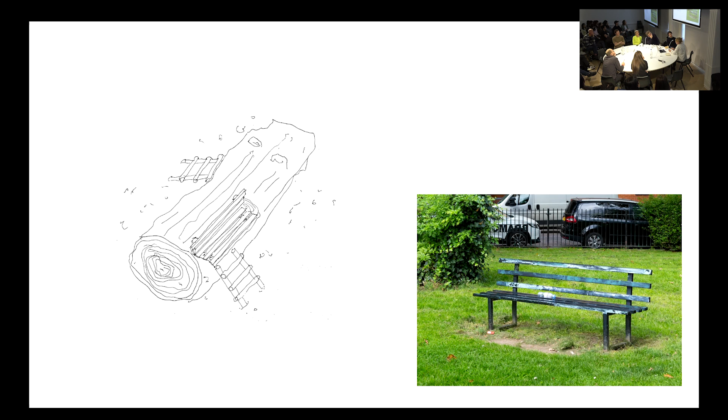We're also working with Ashwell's Reclamation Yard and Fallen and Felled, who collect and mill fallen London hardwood trees for lots of the play objects around the park, as well as putting in reclaimed sleepers for the retaining walls. This is an existing oak that we're going to use, at Fallen and Felled. So we're going to do things like this very big log sculpture, and chop the legs off this existing bench to put it into the log.

I put this in because this is sort of our inspiration. We're trying to make it really visible that we're not doing too much to the materials we're putting in the park, but we're doing it playfully.

This is the day that Ben from Local Works found this oak log, which we don't think we need to do too much to. We think, as long as we get it to the site, it's going to be a really amazing thing in the park that will be used really well.

Then there are kind of less visible moments. All of the topsoil is being reused, and the self-binding gravel path is going to use stone waste instead of standard Breedon gravel. What happens with Local Works is that they make a load of samples, which they've been testing from really early on in the project to make sure the gravel path is to the correct standard, so we can put that in our specification.

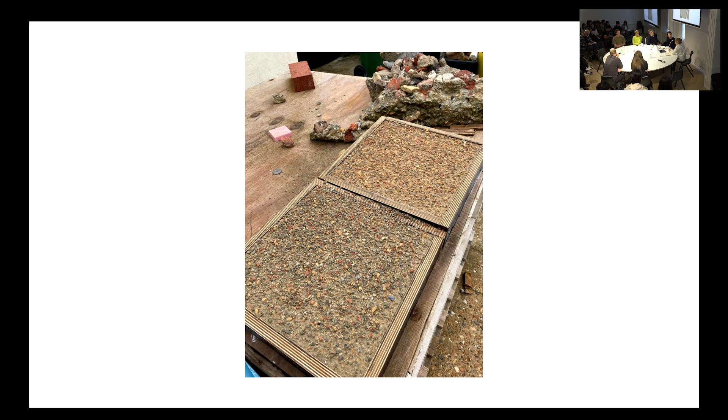And then a lot of the new timber is chestnut coming from a relatively local coppice, Kent woodland. So we think it's going to be a really beautiful project.

Reuse is at the heart of it. Some of it is really not noticeable, in the paths, the topsoil, and the reusing of the bins. And some of it will be a lot more visible, kind of weird and a bit more performative, in some of the pieces of infrastructure. That will give it its narrative and its charm. And yeah, that's it.

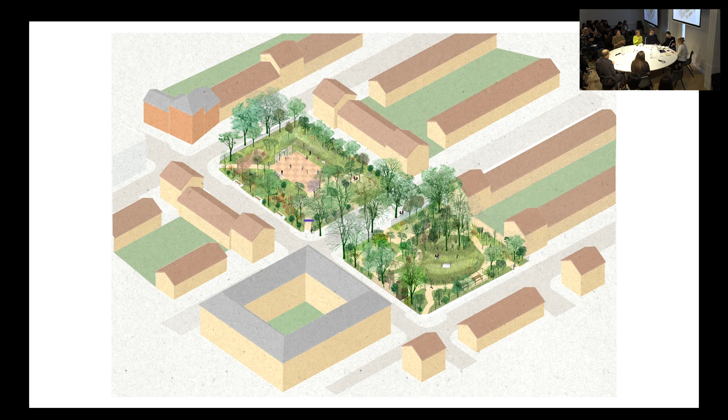All right, thanks everyone. That was great.

Thank you for using some really cool vocabulary that I've been writing down. Some of my favorite words and terms: self-binding, wonky, performative, component hunter, wastage. This is my favorite: large laps, reduced cupping - I never thought I would write that sentence. Physical capital, meat racks, bones, and the most used word was probably wins.

So we can reflect on those, but I wanted to start with a really practical question, which is kind of what I want the point of today to be. You all have the beginnings of something really interesting, and you've made heroic efforts. So how do you think you can reproduce or replicate these efforts without a new class of consultants sort of emerging and taking all of that excitement and interest away from you? Or do you need more people to consult with? For instance, Dylan, what you learned working with BCA about how to reuse these particular oak panels - is there anything practical you learned in terms of the specific material or the protocols that you think you can easily apply again? So that out of this relationship, it's the architect themselves who's gained knowledge, rather than outsourcing it to a new class of reuse consultants. Maybe the same kind of question to everyone.